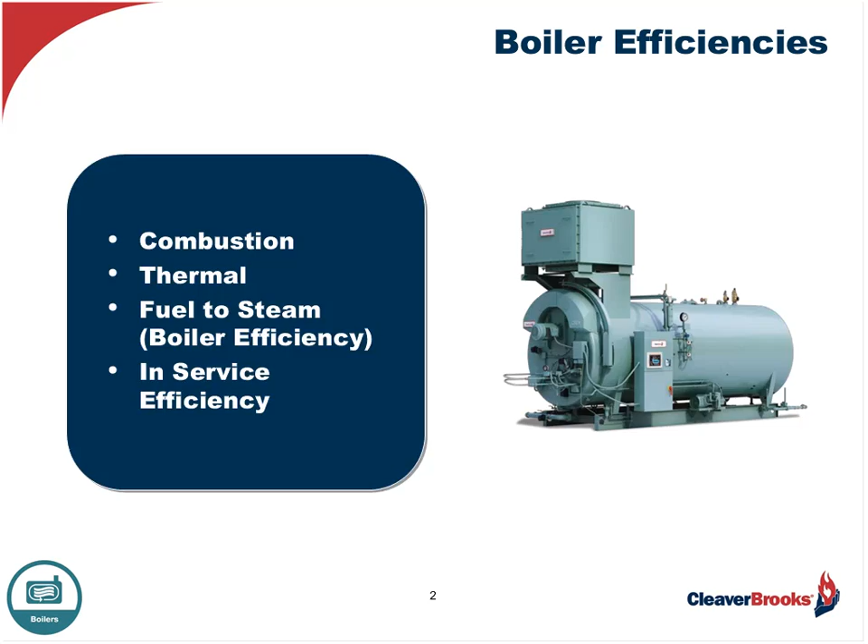When we talk about boiler efficiency, we can boil it down to these basic terms. We have combustion efficiency, thermal efficiency, and fuel to steam or fuel to water efficiency if it's a hot water boiler. That's also the same as boiler efficiency, so boiler efficiency and fuel to steam or fuel to water efficiency are synonymous terms. The last one, which has come out recently and is a good way to evaluate boiler efficiency, is termed in-service efficiency. Today we'll go through those and determine what they really mean.

If we start with combustion efficiency, actually combustion is a chemical process. It starts with a fuel which is primarily carbon-based. It could be natural gas, it could be oil, which has hydrogen in it. We also have, within that fuel, possibly some sulfur if we're burning oil, and we have nitrogen.

Then we combine that with the air that we breathe for combustion, which contains oxygen and nitrogen. Nitrogen, by the way, is about 78% of the air that we use for combustion, and quite frankly, that goes along for the ride. It does nothing as far as oxidation is concerned.

So then we have a burner that takes these elements, the chemistry goes on, oxidation occurs, and when that oxidation occurs, what we get is heat that comes out, the BTUs. We have some CO2, carbon dioxide, which some will refer to as the global warming gas. We have some water, and we have carbon monoxide possibly, which we try to keep to a minimum—we'll talk about that later. We might also have some nitrogen oxides and sulfur oxides, depending upon the fuel. These are emissions that come out of this oxidation process that we have to contend with.

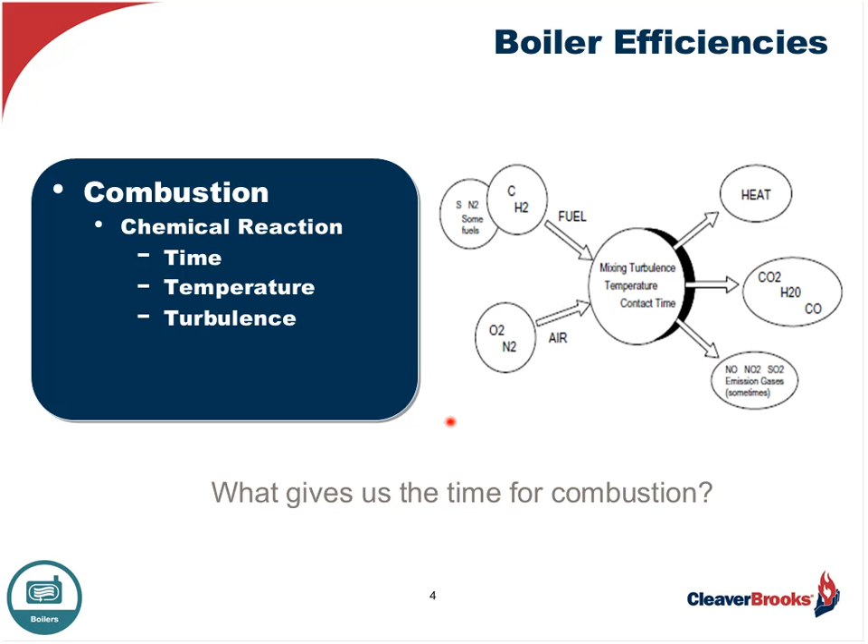Now, if we look at radiant heat transfer, we're talking about things like emissivity. We're talking about the theory of Stefan Boltzmann, who looked at radiant energy and how effective it can be if properly employed. Remember, we've got a huge delta T here. You've got temperatures in this furnace over 2,000 degrees, and a water side temperature that might be in the 300-degree range or less. Tremendous delta T, and as a result the heat transfer is very extreme, and we want to take advantage of that. That's one of the things boiler designers today are doing, trying to take more control and advantage of radiant heat transfer in the furnace.

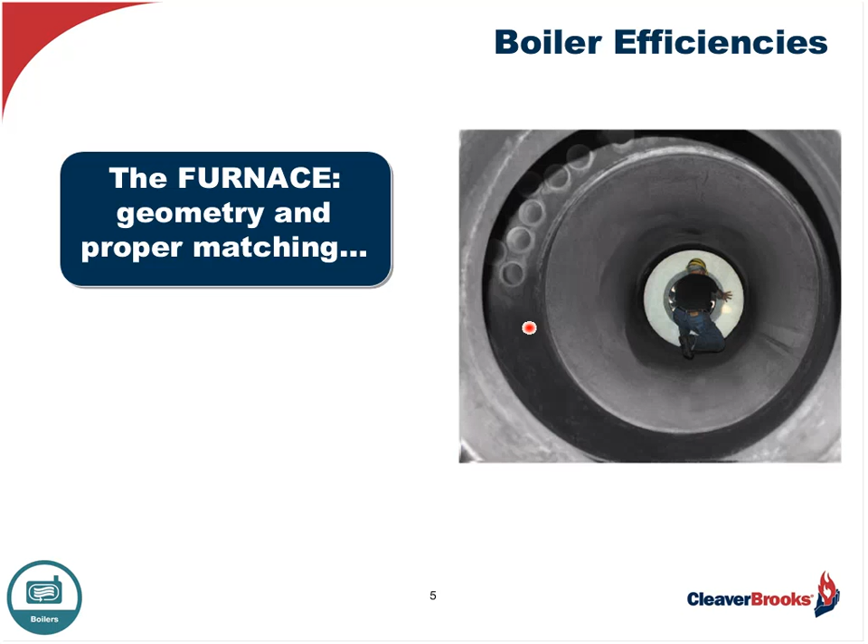So for us to be able to achieve 100% combustion efficiency, I have to burn every single molecule of fuel. I'll have no excess air, no hydrocarbon, no CO. That is called perfect combustion. If you want to put a number on it, it's 100%. It's stoichiometric combustion. But you know that's not found in the field.

We don't do that in the field. We don't set it up that way because it could be dangerous. If we start to go fuel rich without proper control, we can have what we call a fireside occurrence in this business. The reason is variances in the atmosphere we have positively no control over: the ambient temperature of the room, which is our combustion air, the barometric pressure, which can rise or fall, the relative humidity, the calorific value of the fuel. All these variables make us set these burners up at something less than stoichiometric. We've got to go on the conservative side, so we add additional excess air to keep us safe.

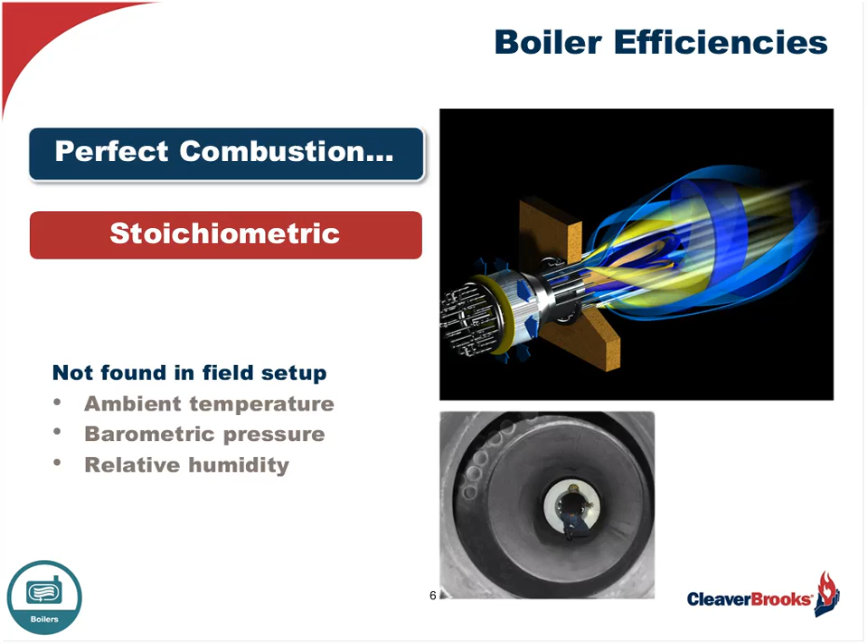So what is excess air? Well, it's nothing more than that percentage of air which is above the stoichiometric, 100% combustion efficiency point. Remember, when we talk about combustion efficiency, we are only talking about the effectiveness of that burner to properly oxidize the fuel and air and combust. So when we talk about excess air, it's that percent, that volume of air, which is over stoichiometric combustion.

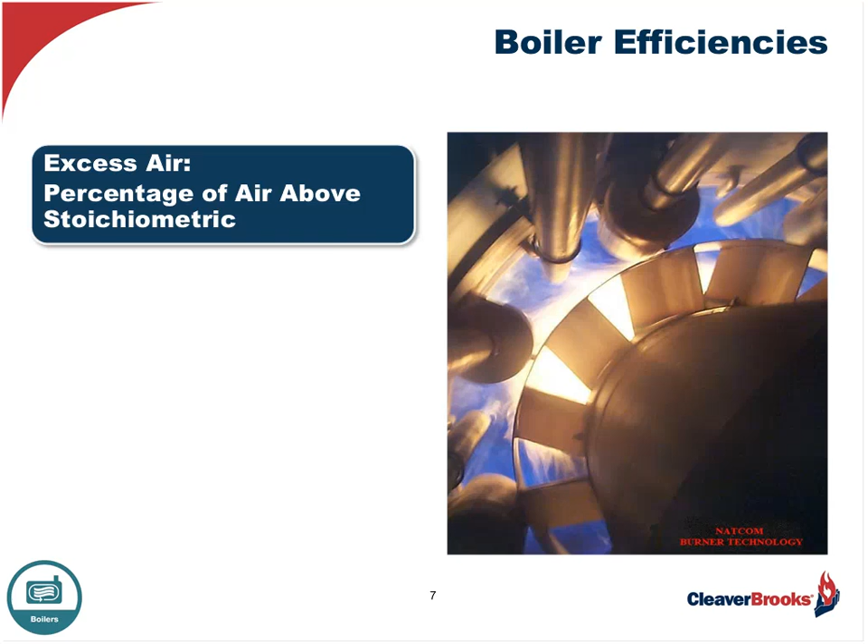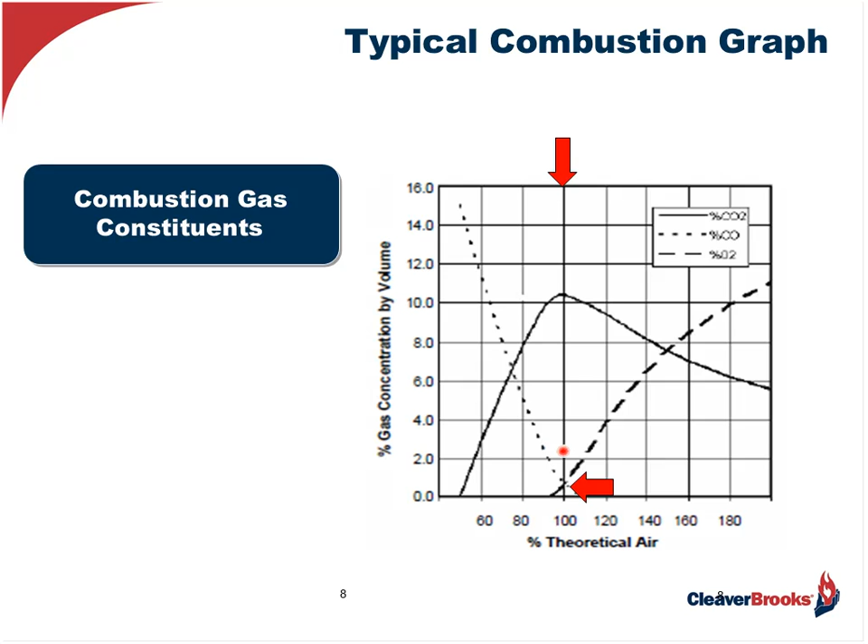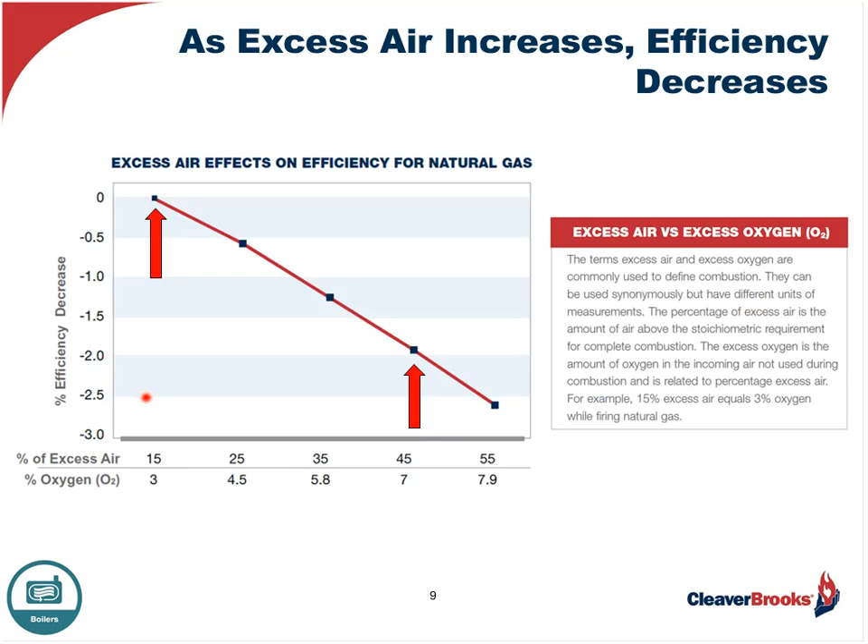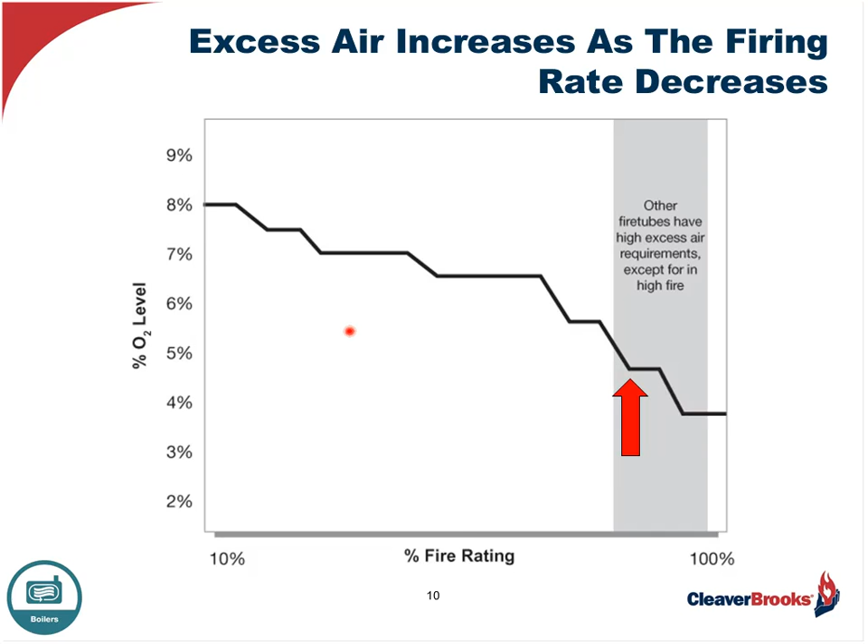I mentioned before that there's variables that we have no control over. One of the biggest threats that we have to good, safe, and efficient combustion is the temperature in the room, the ambient air, the secondary air that we use for combustion.

Here what we did is we set this boiler up. It was 80 degrees in the boiler room. The barometric pressure was 29 inches of mercury, and we set it up at 15% excess air, which is 3% O2. Not at all uncommon, especially down south in the summertime. That temperature in the boiler room creeps to 100, you've got no control over that, or it goes to 120. Look what happens to my margin of error: 9.6, 1.1. I'm getting close to stoichiometric here.

Pretty dangerous. Now, if I go the other way, I'm blowing that nitrogen out the window, right? 78% of our air, where I go from 80 degrees to 60 degrees in that boiler room here in Milwaukee. The air is now denser, it's colder, it's denser, and as a result, my excess air increases. I'm just heating that air and blowing it out the stack.

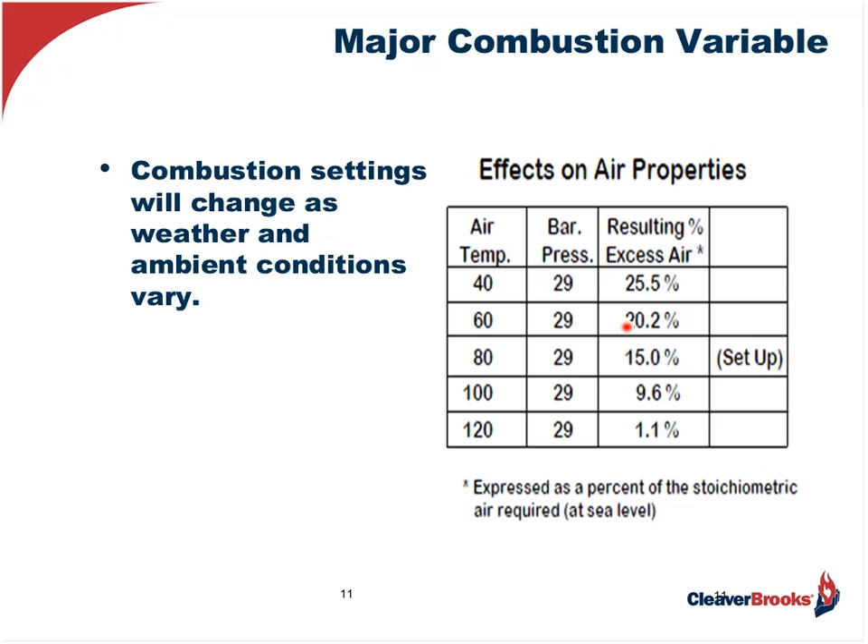So what do I do about that? This is where an O2 trim system can really help. If you have a boiler room that varies in temperature and you've got no control over it, and or you've got a boiler that modulates a lot, especially one with single point positioning, a lot of linkage, it's a good candidate for O2 trim. If that boiler room doesn't vary in temperature, if it doesn't modulate a lot, it could be a waste of money.

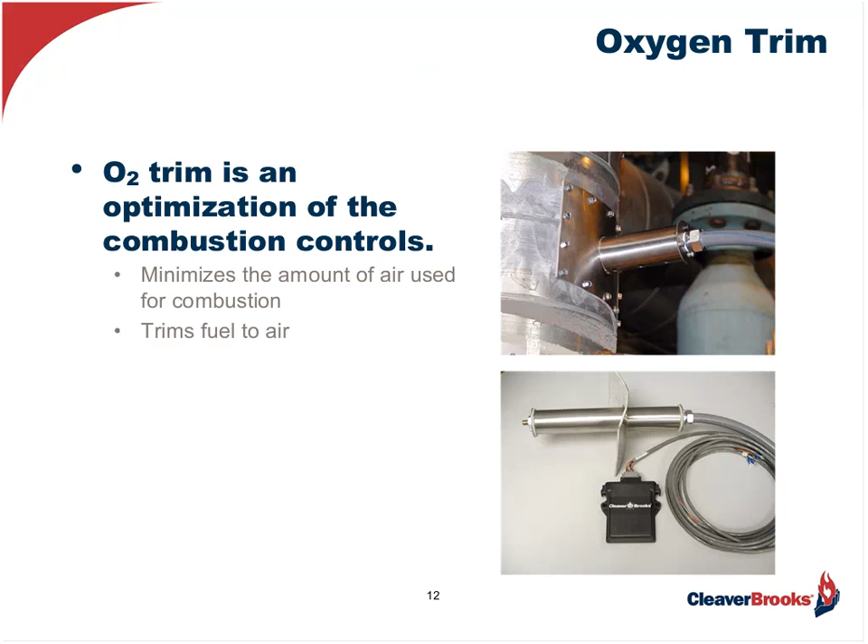Now, the other thing that's very important to keep in mind when we're talking about combustion is supplying the proper amount of air for that combustion process. A good rule of thumb that we've used over the years is 10 CFM per boiler horsepower. 8 CFM of that is to support the combustion process, to oxidize the fuel, and 2 CFM is used for ventilation. That's not to keep the boiler operator comfortable, it's really to make sure that room does not go negative.

Let's say we've got a 300 horsepower boiler, we need 3,000 CFM of air. You divide that by 250, and that will give you the cross-sectional area in the room that we need for ventilation.

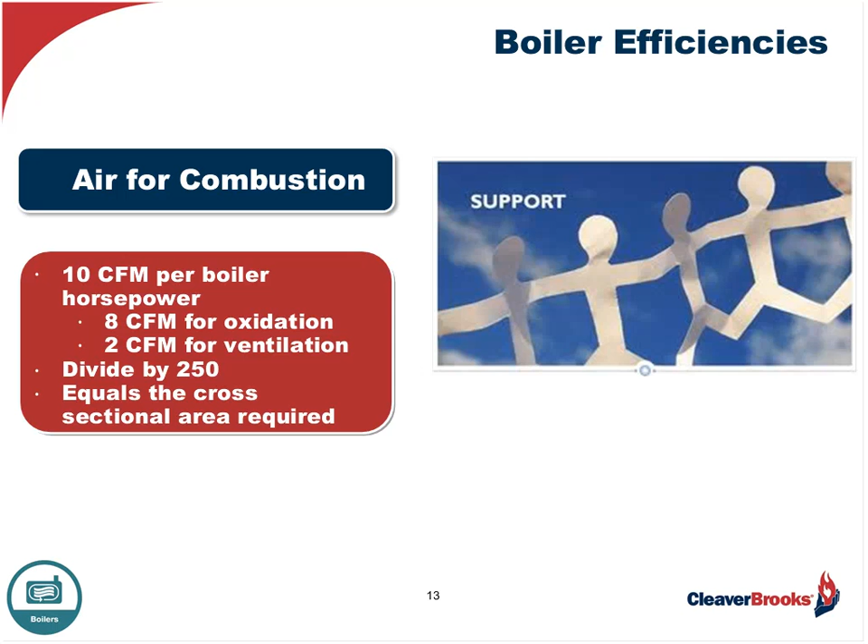Okay, let's move on to the next efficiency criteria that we would like to define, and that's thermal efficiency. Thermal efficiency is nothing more than the ability of this heat exchanger that you see right here. Here's my burner, it's firing into the furnace. That's the radiant area right there, as you can see, in the furnace. And then I've got these convective passes. This fire tube boiler has these tubes, the hot gases are going through it. When I talk about thermal efficiency, I'm only talking about the ability of this heat exchanger to absorb the heat, to take that heat, put it into the water, and generate hot water or steam. That's all I'm talking about.

That energy is going to vary as I turn the burner down. I can have a 4-to-1 turn down, a 10-to-1 turn down, or a 20-to-1 turn down burner. It's all about the amount of energy going into that unit that is being absorbed by that heat exchanger, so it goes into the water to make hot water or steam. It does not consider radiation and convection losses. So that means those radiation and convection losses are lost somewhere, they're not going into the water to make steam or hot water.

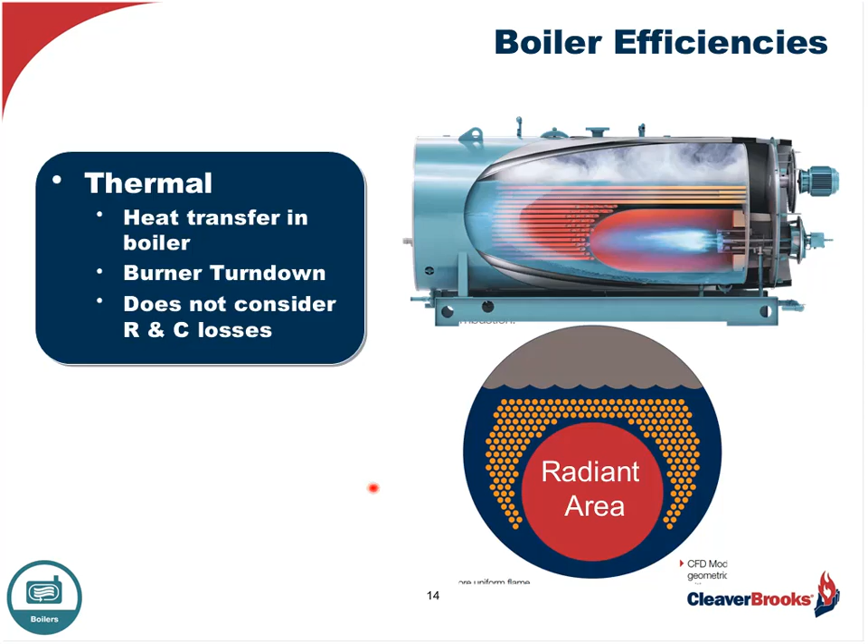Keep that in mind, we'll address it a little bit later. Now, one of the things that boiler manufacturers and designers are doing today to improve the overall convective heat transfer in the boiler, to enhance that thermal heat transfer and increase the overall thermal efficiency, is to add extended surfaces inside of those tubes to break up the gas, to get away from the laminar flow, which increases the Reynolds numbers, which is nothing more than a ratio between inertial and viscous forces, and also the heat transfer coefficient, which is the heat flux ratio against delta T.

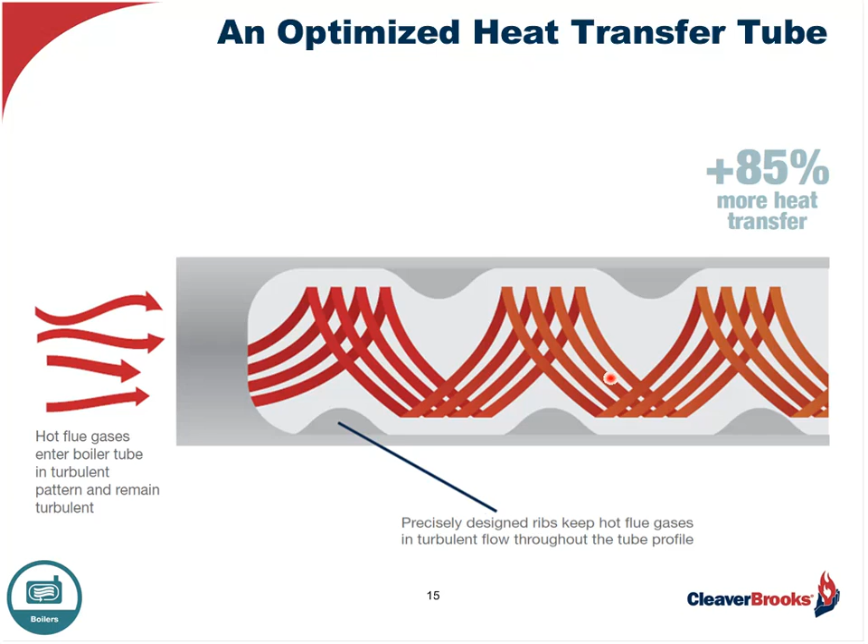So that's thermal efficiency. Now what about fuel to steam or fuel to water efficiency? Here, what you have is the net amount of BTUs that will be going to the process or going to heat the building, the hot water to heat the building hydronically. It's net of radiation and convection losses.

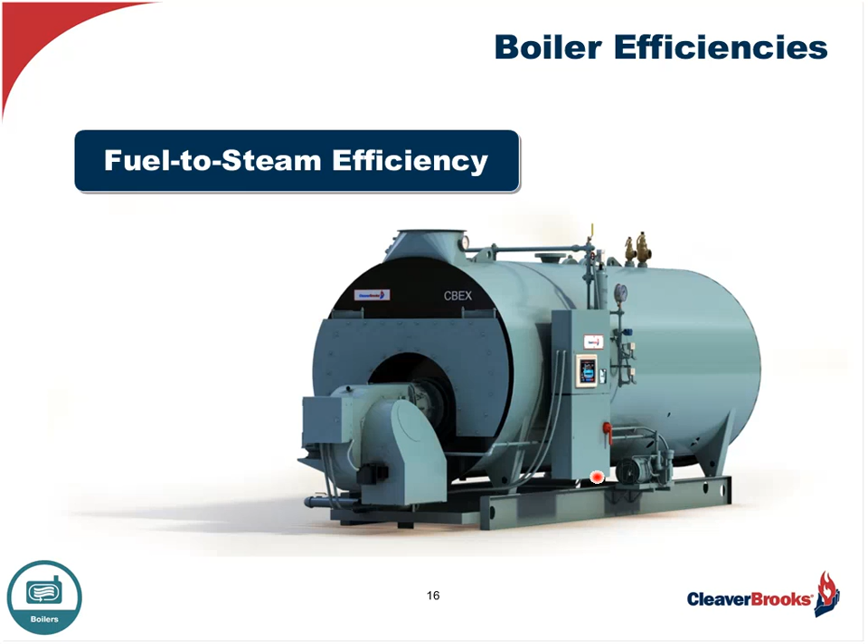Now, if we look at various boilers, those convection losses can differ anywhere from 0.5% to 2%. In other words, in a large fire tube boiler like this, it could be 2%, 1.5%. On a small little vertical fire tube like this, it might only be 0.5 or 0.75%. It depends upon the mass.

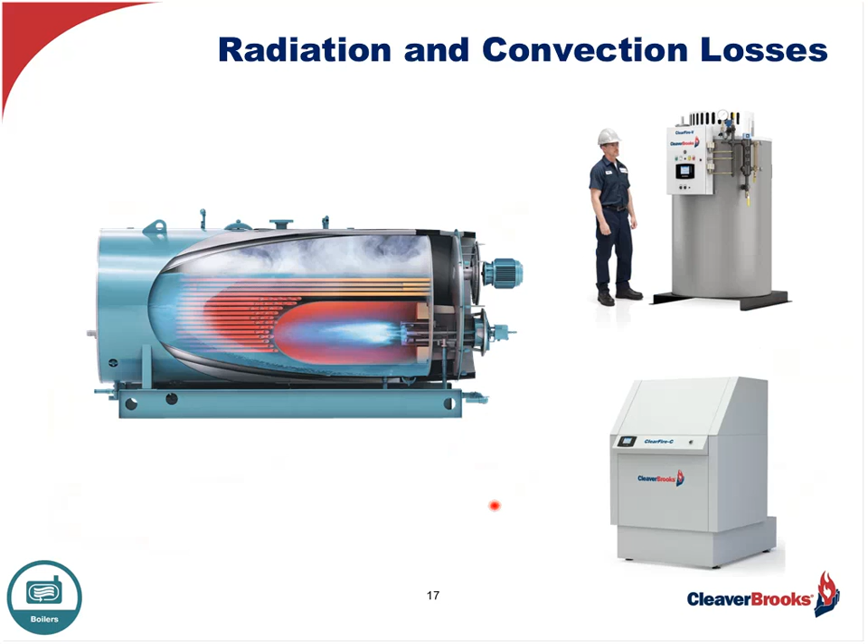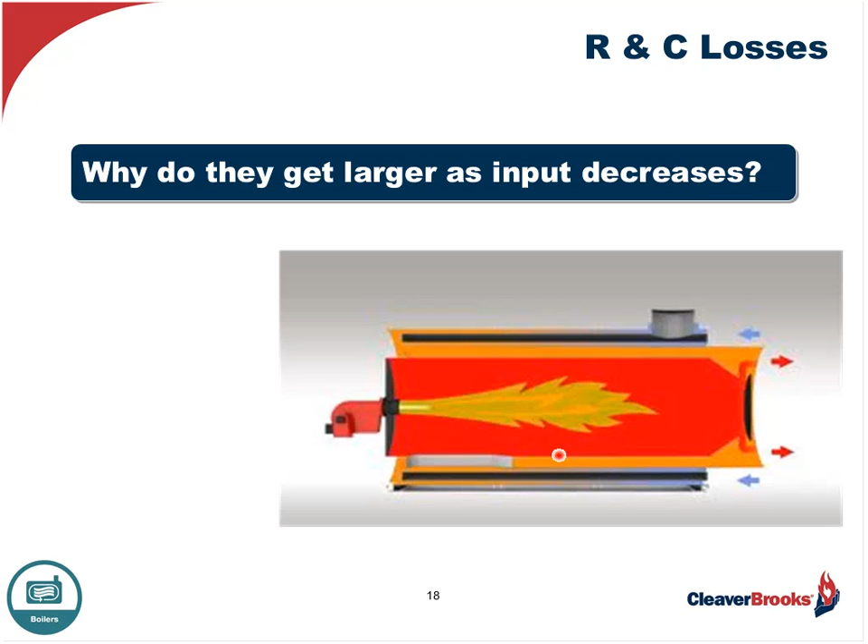Now remember, when we measure radiation and convection losses, and the reason I mentioned turn down before when I talked about thermal efficiency, is it's all based on input. The fact is, when we're considering radiation and convection losses, they get larger as the input decreases. Why would that be? The reason is your mass within the boiler itself - let's say we're operating at 100 pounds, the saturation equivalent to that is 338 degrees. Regardless of where I turn this burner down, that temperature is not going to change. So as I decrease the firing rate, therefore the input, I'm dividing into an ever smaller number.

So therefore the radiation and convection losses climb inversely to input.

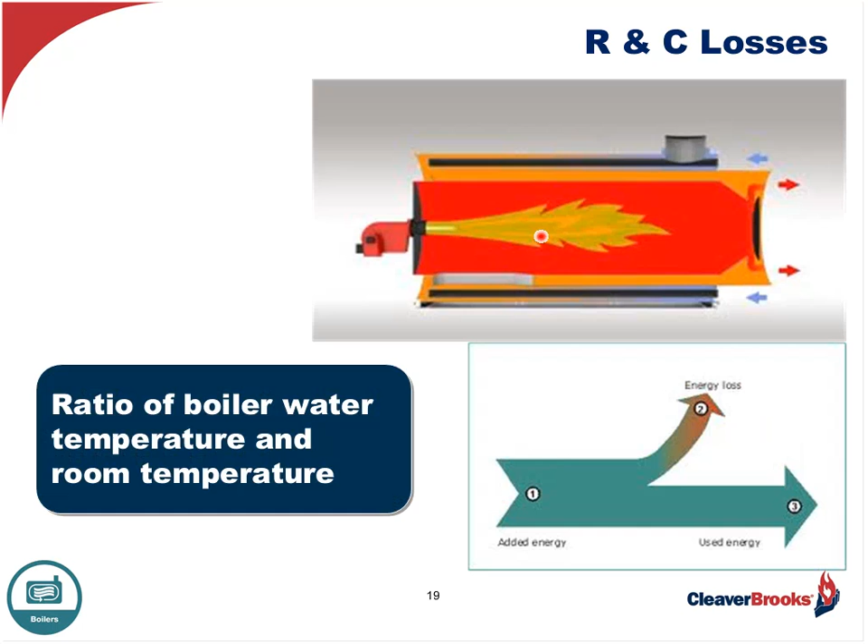All right, well, how are boilers rated? That's the next question.

Keep this in mind. When we as boiler manufacturers and promoters are selling boilers, what the engineer starts with is a catalog or engineering data. We're going to catalog that boiler saying it's a 100 horsepower boiler. Well, that's based at full fire, at 0 gauge pressure. All I've got is 14.7 pounds at sea level, so my gauge is reading 0. My feed water, keep this in mind, is 212 degrees. Now, how many boilers out there are fed with 212 degree water? But that's how we base the sizing of these boilers initially.

And then the engineer has to be smart enough to make accommodations accordingly based on the load, or what he's heating, or what the process might be, and size the boiler accordingly, if the feed water temperature or the operating pressure is going to be more than that, and obviously it will be.

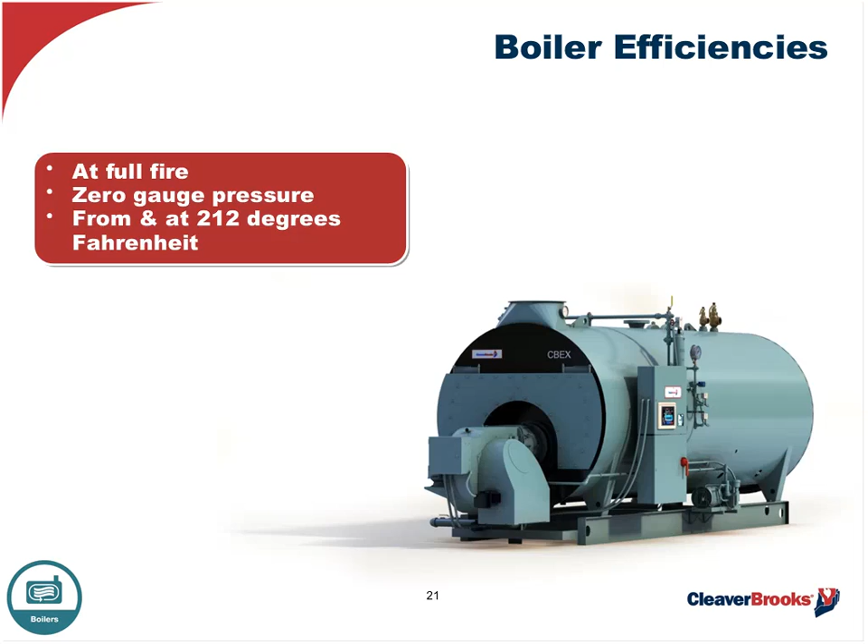So what else do I have to be aware of? Well, when we're looking at boiler efficiency and how well we're doing, you've got to remember that you have to benchmark the information that you're looking for. So let's say we're looking at the stack temperature coming out of that boiler. The stack temperature in an efficient boiler is going to run anywhere between 50 and 100 degrees above the saturation pressure or temperature based on pressure.

So when we're looking at efficiency and we want to evaluate it, the first criteria we have to look at is what's the operating pressure, because that's got an equivalent temperature. More importantly than that even is what's the firing rate? Am I at low fire, medium fire, high fire when this stack temperature is occurring? What's the ambient temperature in the room? Is it 100 degrees, is it 60 degrees? Because that's going to add to the gross temperature of that stack.

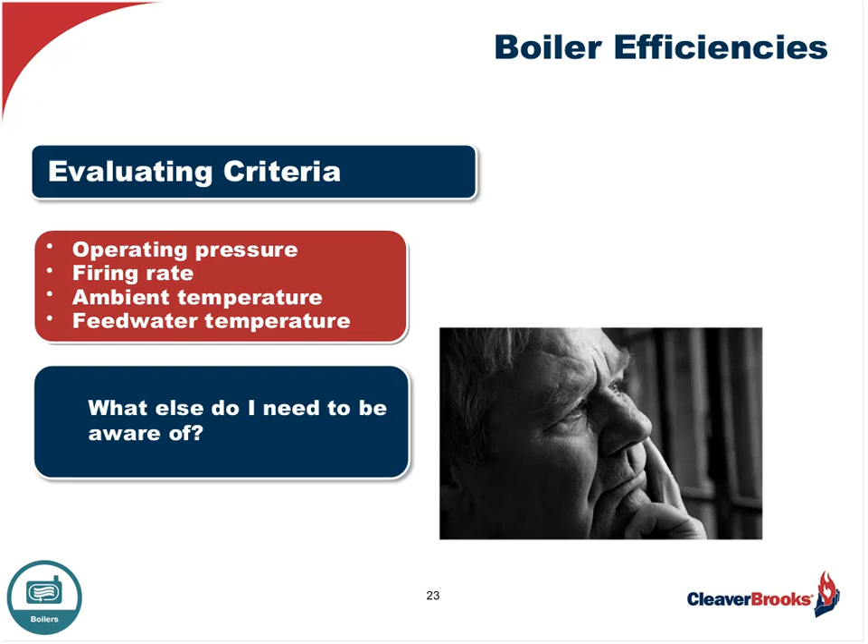And then lastly, what's the feed water temperature? What's coming into that boiler? Is it 212? No, 180? Could be. 227 coming out of a deaerator? Could be that. All right, what else do I have to be aware of?

Once I've established that benchmark, and I now have something logged in my boiler room log that says my stack temperature is now 395 degrees, I'm operating at 100 pounds. The next day you come in and my firing rate is high fire, the ambient temperature in the room is 90 degrees, and my feed water temperature is 180. You come in the room the next day, or 2 hours later, the criteria is all the same, but my stack temperature has gone up.

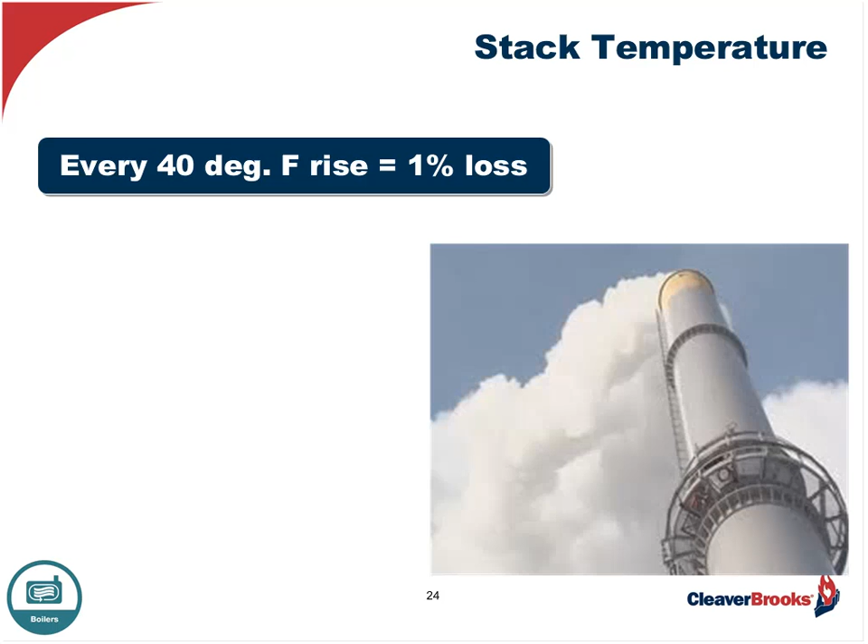That costs you 1% in fuel to steam efficiency. And what causes that? Sooting on the fire side, scaling on the water side. I'm impeding the heat transfer across those tubes, whether it be a water tube or a fire tube. So the first thing is to make sure you've got a very reliable stack thermometer in that stack, and you very conscientiously log temperatures against pressure, firing rate, ambient temperature, and feed water temperature. Very, very important, because when you see something like I'm showing you right now occur, something's gone on with that boiler. And 9 chances out of 10, it's the water side or the fire side that's either gotten fouled from soot or scale.

Another example, follow me here. I'm at 220 degrees, my flue gas temperature. I've gone to 260, and you can see right here in the numbers, I've gone from 84% to 83%. I've lost 1% based on that 40 degrees. Now here's something else that's really interesting when I talk about the confusion in terms out there. This is really a fuel to steam or thermal efficiency chart, but look what they call it, combustion efficiency for natural gas. It has nothing to do with combustion efficiency, really.

We're looking at either fuel to steam, or fuel to water, or possibly a thermal efficiency. If the radiation convection losses are included, it's thermal. If they're netted, it's fuel to steam. So that's how this confusion is promulgated.

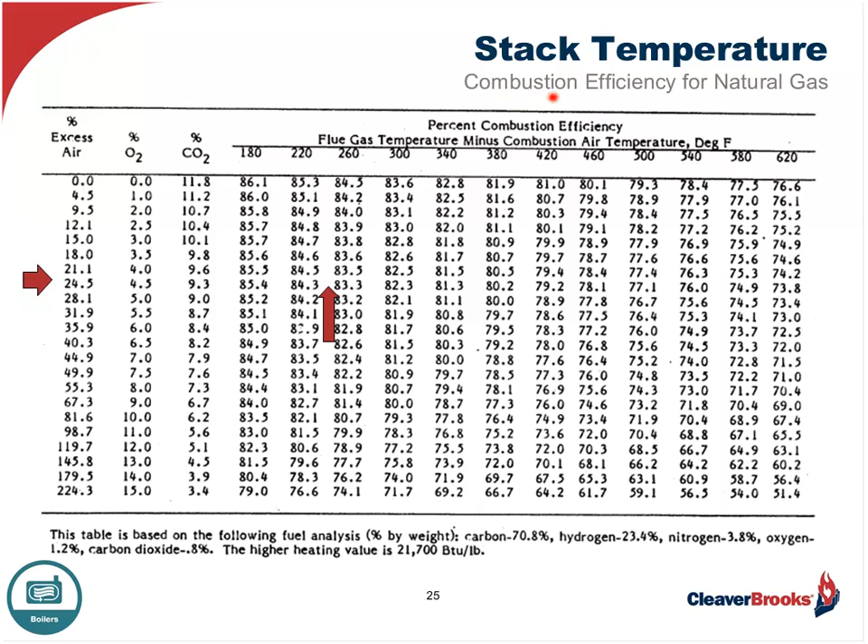If I go to 100 pounds of operating pressure, and I'm at 212 degree feed water, I've lost a little bit, 34.5 to 33.2, because of the operating pressure increase, more BTUs required for sensible energy to get that temperature up so I can start to apply my latent energy. That's why that is.

But anyway, look at this drop because of the two: 100 pound operating, 100 degree feed water, I'm down to 29.8. So when I thought I was going to get 34.5 because of these conditions, I'm down to less than 30 pounds per hour, per boiler horsepower. The importance: operating pressure, feed water.

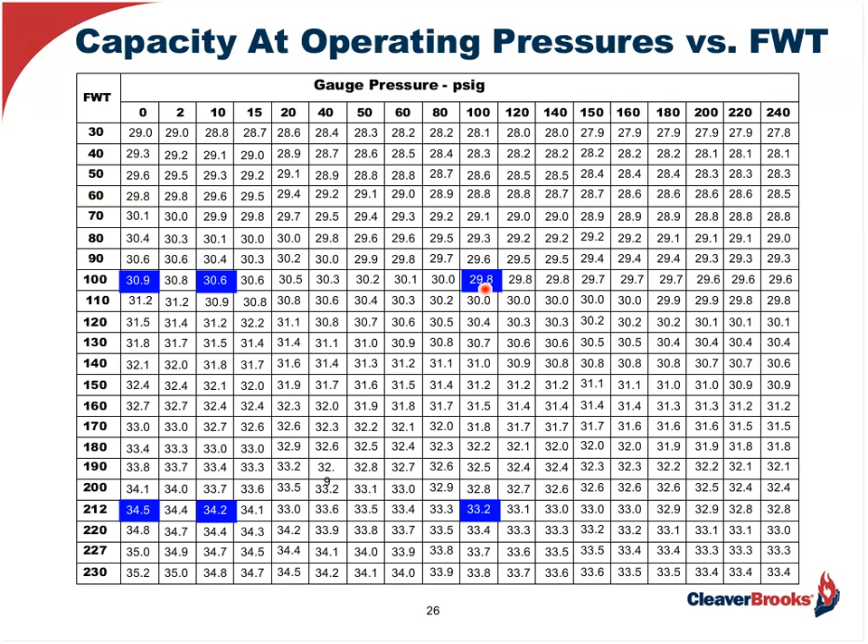Now let's talk about the boiler sweet spot. We've got a number of boilers that we manufacture, various types, configured with various controls and burners and so on. But every one of those is unique. Each type has its own signature based on horsepower, fuel, burner, and so on. It's got its own signature, its own sweet spot, and that becomes very important.

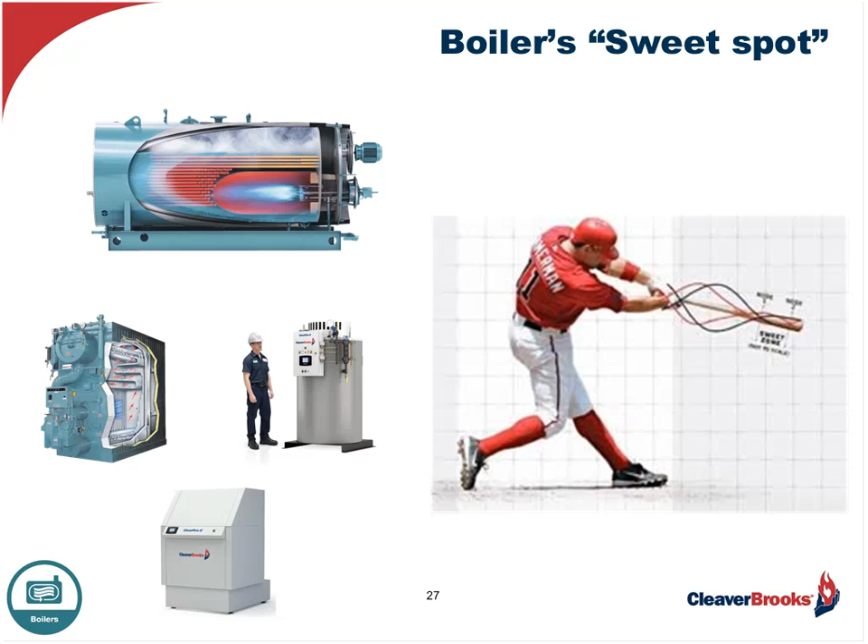We understand the load so that I can select the proper boiler to handle that particular load so it's operating in its sweet spot most of the time.

As I said before, we find a lot of boilers out there operating at about 60% of the firing rate. In this particular case, and there's a lot of them out there, we just took an overall average—this is the sweet spot. That's where you want it to run. You don't want it running down here or down here and then cycling a lot, and we'll talk about that as well.

You want it to be operating at the sweet spot. So you've got to find out from that manufacturer, from that sales engineer, if I put this boiler in, where is it most efficient? So I can size my load accordingly and keep it there as much as I possibly can.

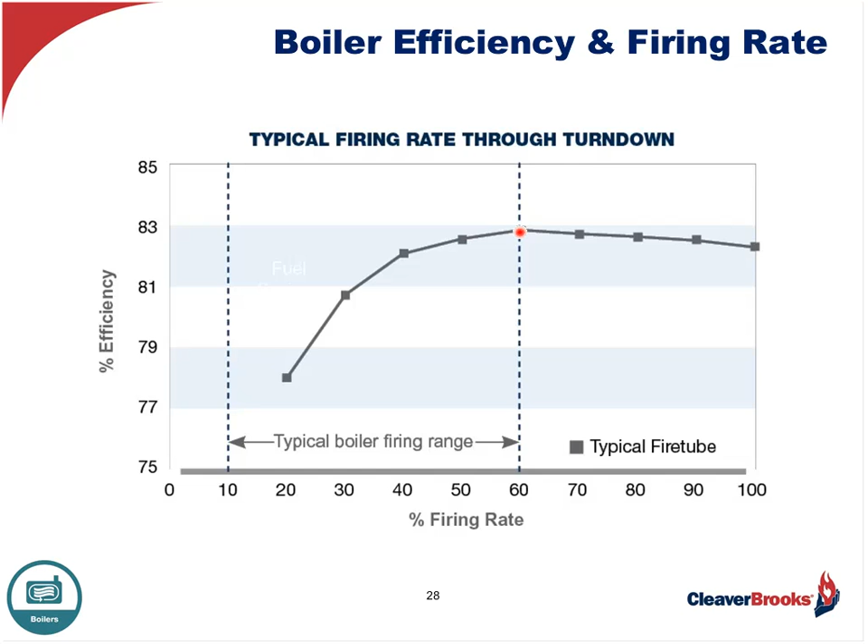Well, then how do I measure efficiency? There's really two methods to measuring efficiency: it's either the input-output method or the heat-loss method.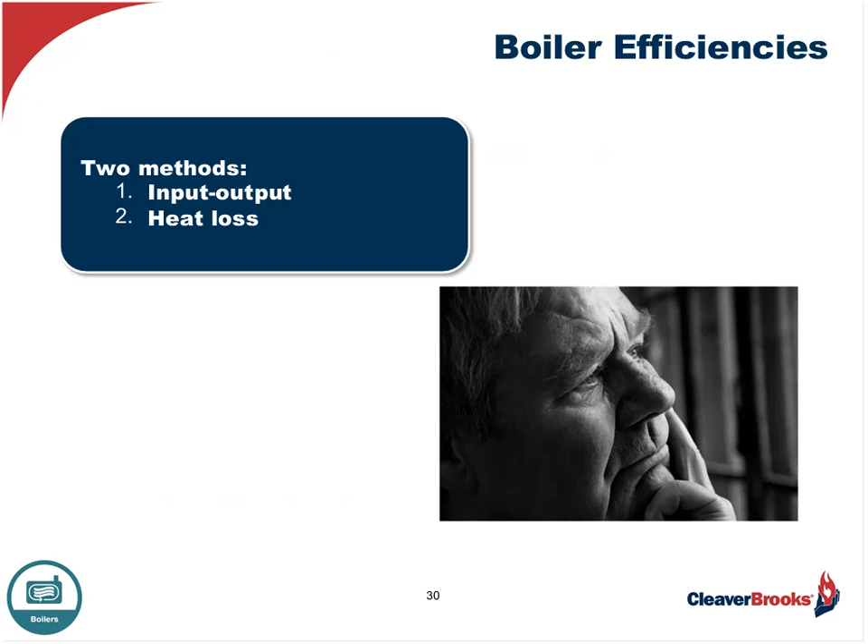If we go to the input-output method, it's much more complicated. Quite frankly, in all the years I've been in this business, and I think Rakesh will attest to this, who's on the expert panel here, the input-output method—the juice may not be worth the squeeze. You have to go through an awful lot to conduct an input-output test.

It involves calorimeters, which are devices to determine the amount of moisture in the steam coming out of that nozzle. We also have to have flow meters—it might be a steam flow meter or a water flow meter, because I want to make sure that what is going in, I can calculate what's coming out of the boiler. So I can either map my feed water or I can map my steam output.

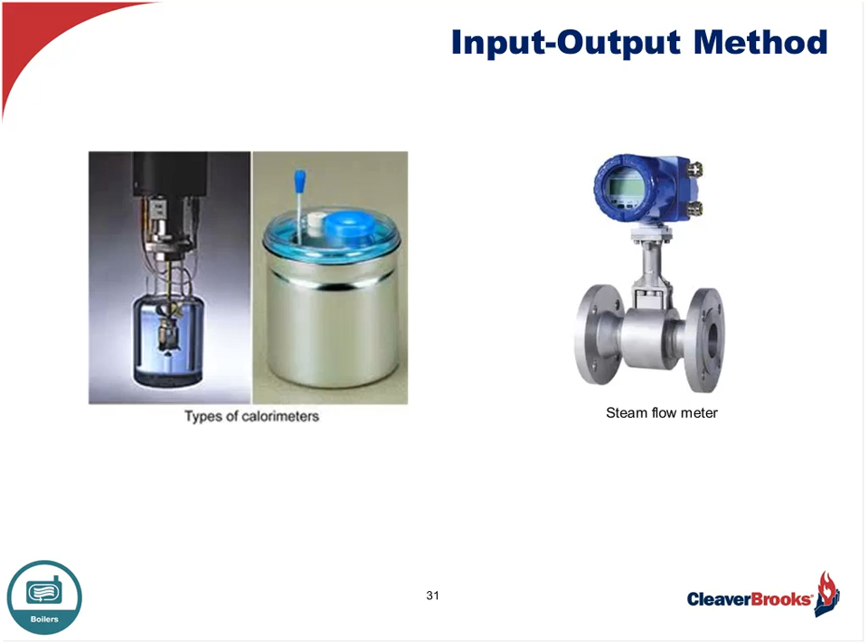And then, of course, I look at stack temperature, the constituents of the gas, my dry gas temperatures, the dry gas and moisture losses, and so on. That all goes into the input-output method. Even though it can be very precise, it requires a lot of labor, instrumentation, and complexity.

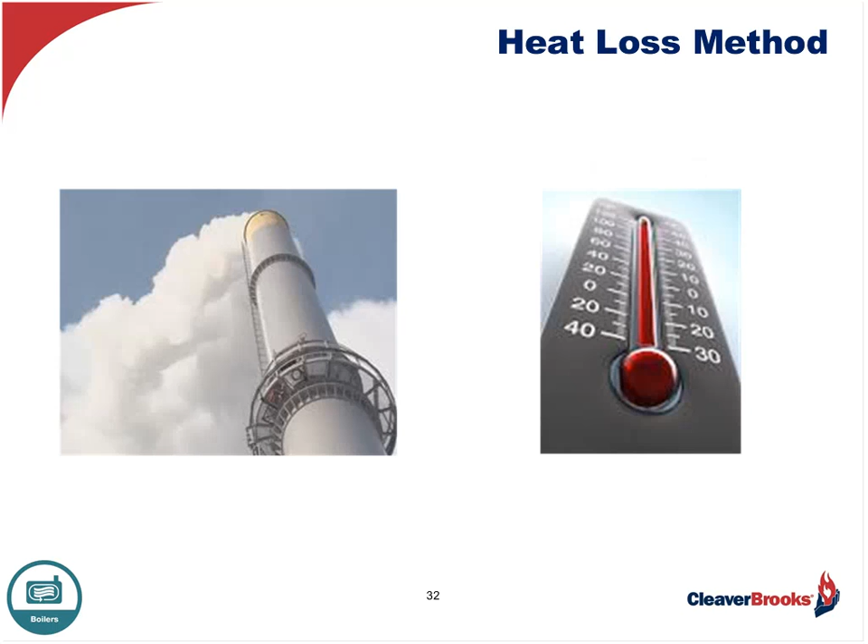We've found over the years that probably the best and most efficient way to go about this is just the heat loss method. What this does is take into consideration what the stack temperature is above the saturated temperature of the boiler itself. It takes into consideration the constituents in that gas, and it also accounts for the moisture losses.

So what we're looking for is the temperature, the carbon dioxide, the excess O2—remember, we're trying to hold as close to 3% O2 as we possibly can. It'll then give us a net efficiency overall. It'll also say whether or not we've got any carbon monoxide in that gas, or any nitrogen oxides, which are a precursor to smog, so we want to limit that, especially in places like California, Texas, Louisiana, New Jersey and other places.

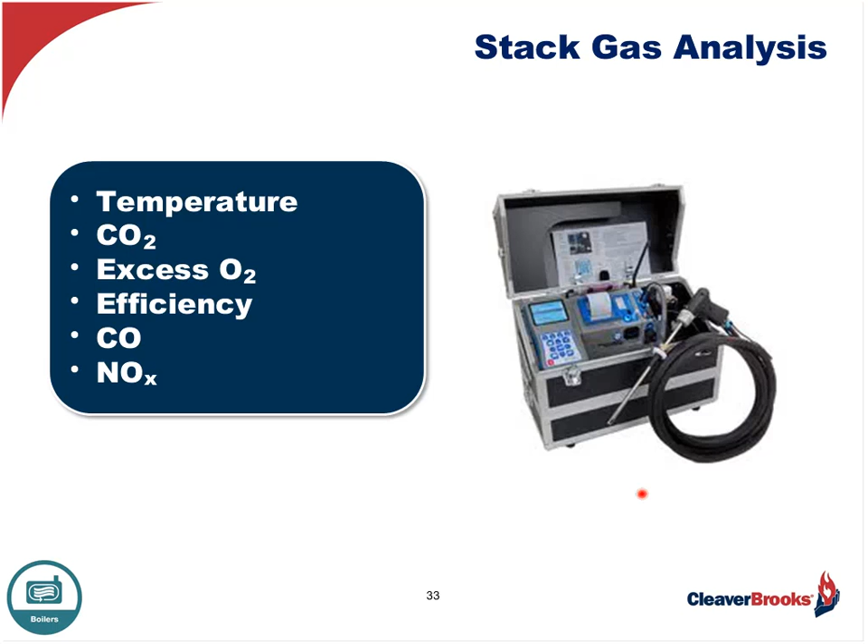That's what this stack gas analyzer will do for us. It's relatively simple, but when you go through an input-output test and compare it to the stack gas analysis, we're often very, very close. So I would rather lean toward expediency as opposed to something more complex when determining my overall efficiency.

Now let's look at in-service efficiency. The criteria for that: stack losses, radiation and convection losses, startup losses, cycling losses which result in purge losses, turn-down losses which relate to excess air. Most boilers, when they turn down, the excess air rises. What about blowdown losses? And what about changing load response? In other words, how effective is this boiler in reacting to load swing? So that's the in-service efficiency criteria.

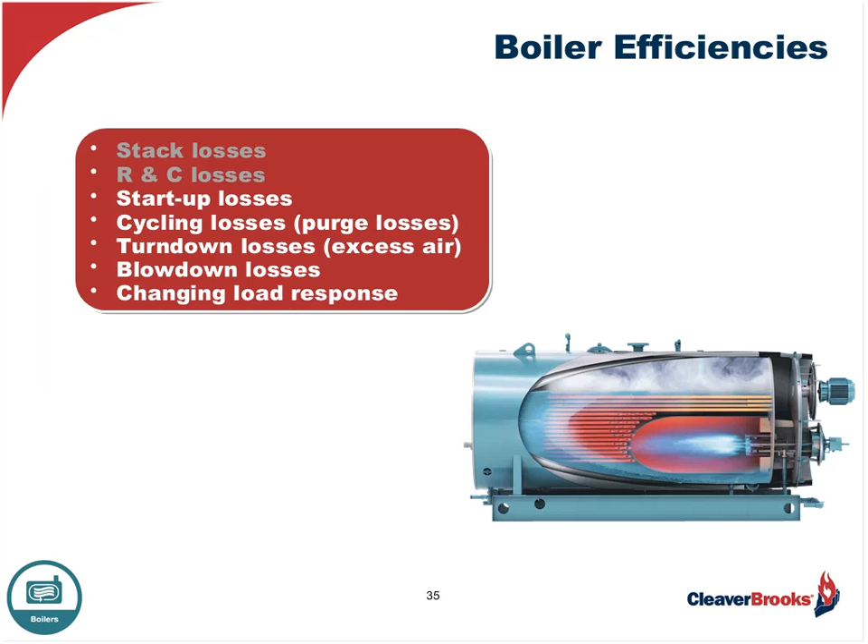Let's look at those. We've already addressed the stack losses and the radiation and convection losses, so we'll move right into the startup losses. Startup losses assume that a boiler is offline and cold, so it's at ambient temperature.

Here I've got a fire tube boiler, which has got a lot of mass — it's 5 square feet per boiler horsepower — against a vertical boiler here that has far less mass, maybe only 2 or 2.5 square feet per boiler horsepower.

The whole point is that if I'm starting this boiler to meet load versus this boiler, and they're both at ambient, this boiler is going to heat up faster and catch that load faster, no doubt about it. So the engineer might say, I'm going to put in a bank of these as opposed to one or two of these.

But don't forget one other thing about this. Once this boiler comes up to pressure, it has a lot of thermal mass — possibly a lot of refractory, a lot of residual heat. So once it comes up to temperature, even when that burner cycles off, it continues to steam.

I don't think anybody would disagree that a boiler that's not firing is more efficient than anything, but this is really true: these larger mass boilers, once they come up to temperature, hold that heat. So once they start getting swings within the load itself, this thing will respond just about as quickly as this one. But it all depends upon that load.

Should I go modular, low heating surface, low mass? Should I go with a larger boiler, fewer in number, but maybe with turn-down matched to the duplicity that would be required for more modular-type units?

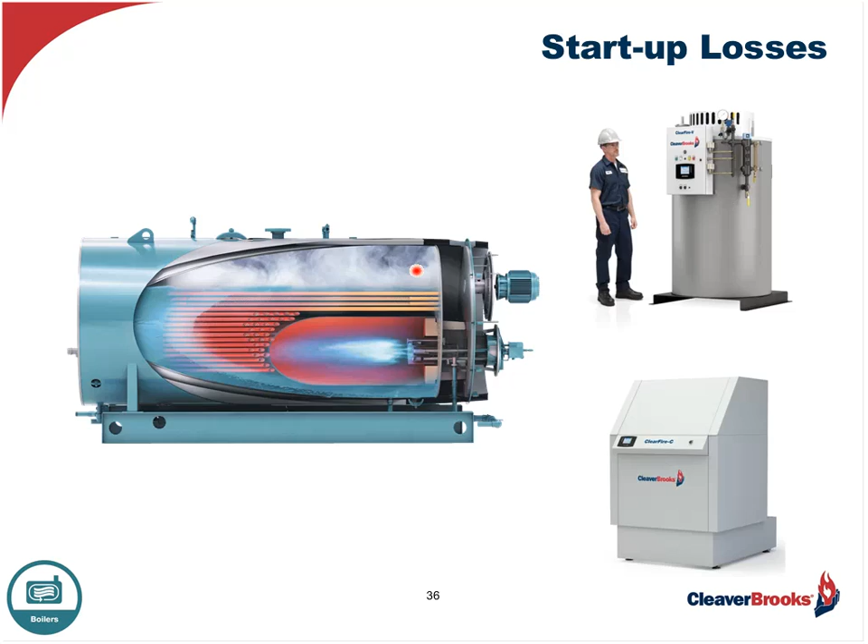What about cycling losses? This is one of the worst culprits as far as energy loss is concerned — cycling. Boilers put in maybe years ago still have a lot of useful life, but they don't have proper turn down, they haven't matched that load. We've done a lot of things to the process and the building, it's much more efficient, and these boilers are cycling, turning on and off 15, 20 times or more an hour.

As a result, we are blowing energy out the stack, blowing dollar bills out that stack because of all the cycling losses, cycling on and cycling off. This is where turn down becomes so important too.

Maybe you've got an older boiler that's still in very good shape. You could retrofit it with a high turn-down burner, or keep the same burner but change the overall linkage and how the damper is controlled and configured, and add 10-to-1 turn down if need be, if it's currently a 4-to-1 turn down. That can be done. Keep this boiler online.

It seems like an oxymoron, but actually that boiler staying online is a lot more efficient than having it cycle on and off 15, 20 times an hour. Why is that? The pre- and post-purge losses.

Every time that boiler goes down, it has to go through a post-purge, blowing ambient air through that boiler and chilling it down. Then it goes through a pre-purge before ignition — another 90 seconds or a minute and a half blowing air through that boiler. You don't want it to do that. You want to keep it online.

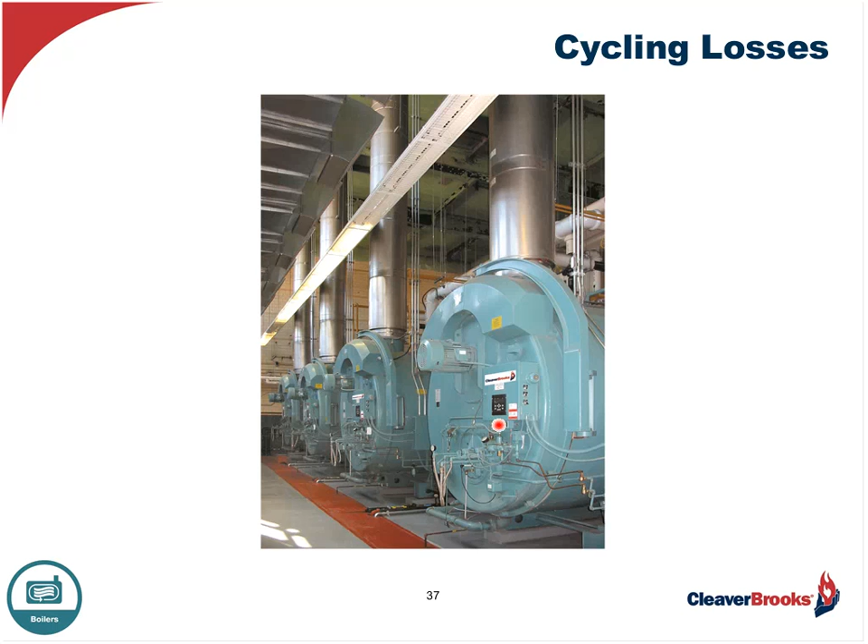Because all we're doing is blowing that energy out the stack into the atmosphere, heating the ducts. That's all we're doing. And remember, when we're talking about burning fuel, we're talking about burning dollars, cash.

Now, blowdown losses was also part of the criteria of in-service efficiency. If we've got continuous blowdown with a boiler, I'm trying to control the TDS level at 1500, or maybe a bit less or a bit higher. Our water chemical engineer has advocated a certain water treatment plan to control the total dissolved solids.

That boiler is skimming water off the top, and it either goes through a separator and into the sewer, or it can go into a shell and tube heater to recover those BTUs and put it into the feed water before it goes to the deaerator or feed system.

Why not reclaim those BTUs? But remember, don't ever try to recapture bottom blowdown. Bottom blow is performed once or twice a day, depending upon the chemical analysis and the requirement. It goes into a separator and you waste it, because otherwise you'll foul things with sludge, and it's so intermittent that the juice isn't worth the squeeze in paying for any recovery. So bottom blow, don't recover. Surface blow, think about it seriously.

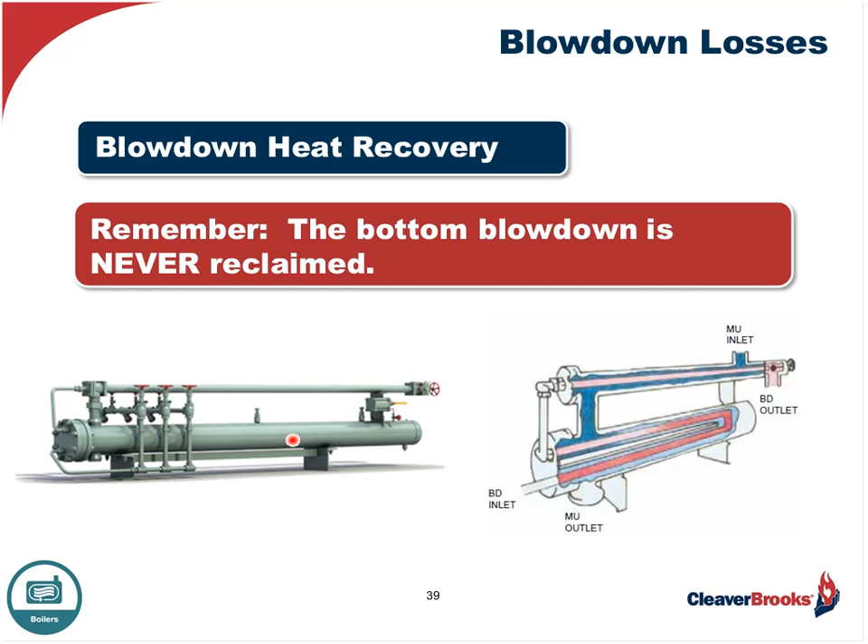What about changing load response? Part of the in-service efficiency. You might think it requires more energy to get a big boiler to respond. Well, from a cold start, absolutely right. If you've got a small modular type unit or a commercial type water tube product, these babies respond very, very quickly. And maybe based on the characteristics of that load, that's what you need.

But don't forget that these bigger boilers you might already have and invested a lot of money in, with controls and burners added, can do real well too if they're properly controlled and programmed, so that once they come up to pressure, they can respond pretty good. Water tube boilers innately respond much better than fire tube to swing loads, varying loads, because they have less mass. They can respond very, very well. But that doesn't mean you throw something like this out. It depends upon the load, what you have, and what might be done to make it respond better.

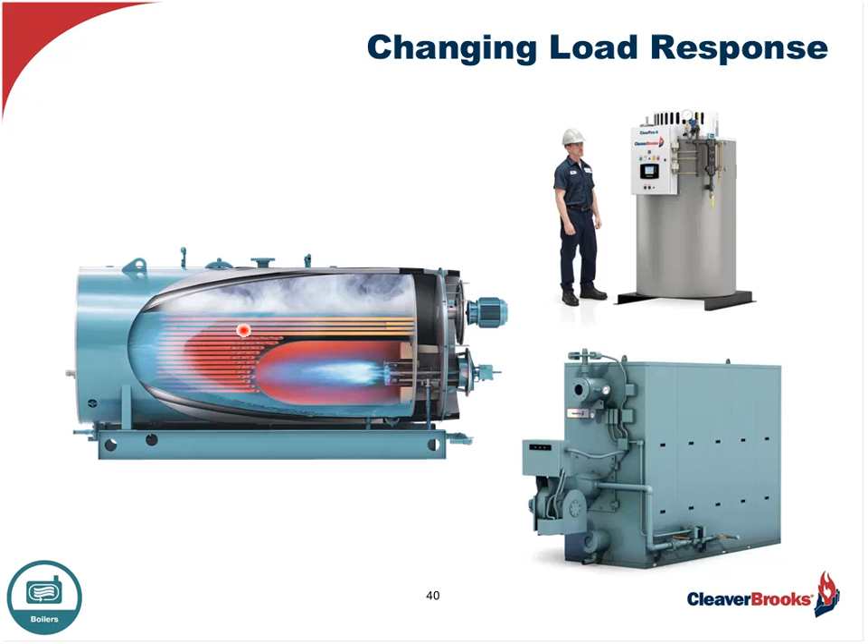So let's recap a little bit. Combustion efficiency takeaway: stoichiometric combustion is 100% combustion efficiency.

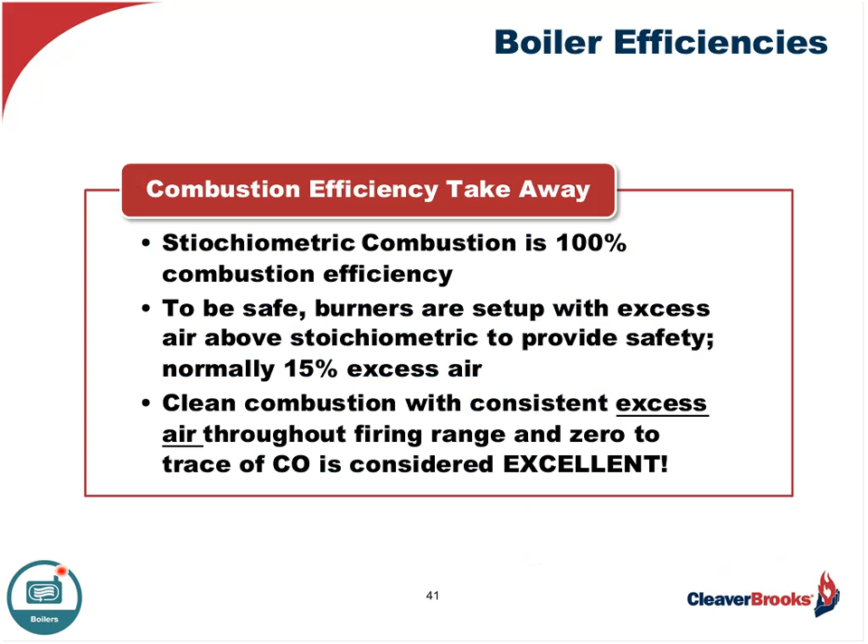To be safe, burners are set up with excess air above stoichiometric to provide safety, normally 15% excess air. Clean combustion with consistent excess air throughout the firing range and zero to a trace of CO, no more than 50 parts, is considered excellent combustion. So that's the takeaway from combustion efficiency.

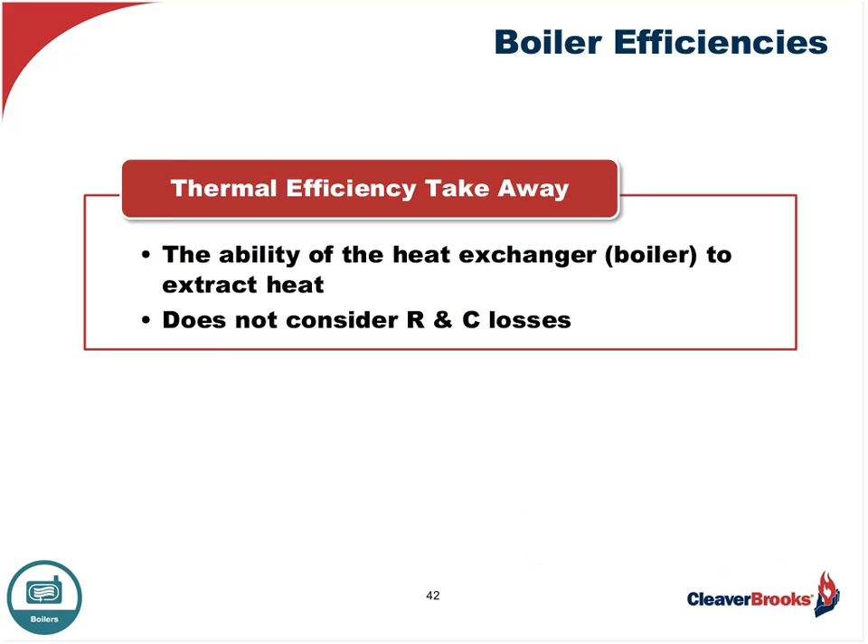Thermal efficiency, remember, does not consider radiation and convection losses. So those BTUs are going into the room that's already 100 degrees. It's not going into the process, not into the hot water to heat that building. What you want to look at is fuel to steam efficiency or fuel to water efficiency. So those are your takeaways.

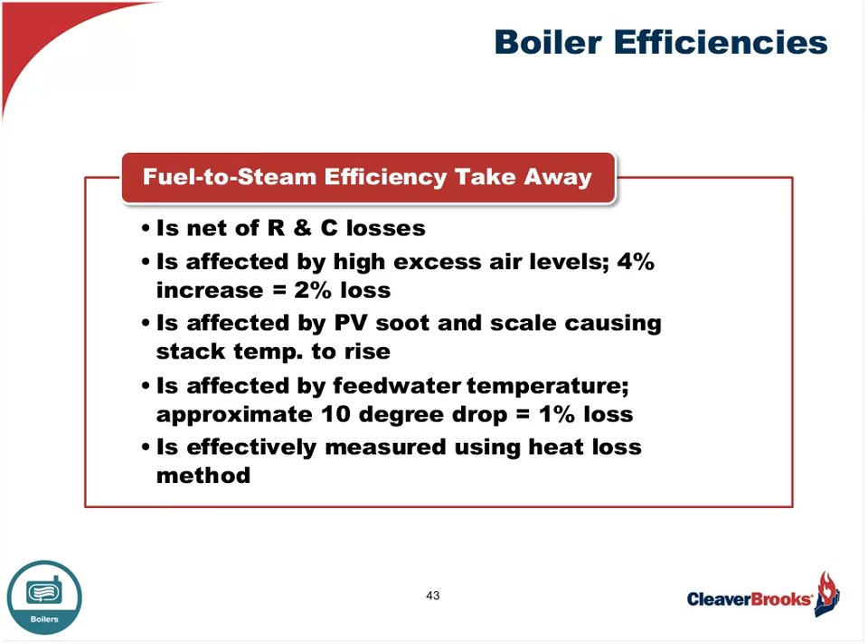In-service efficiency takeaways: cycling losses can cost 15% or more in overall efficiency. Never capture the bottom blow, but think seriously about blowdown heat recovery for continuous blowdown. Responding to load quickly is determined by the boiler mass and the water temperature within the vessel. Keep that in mind. There are good arguments for modular type low heating surface boilers, but also good arguments for a larger mass boiler too. It depends upon the application.

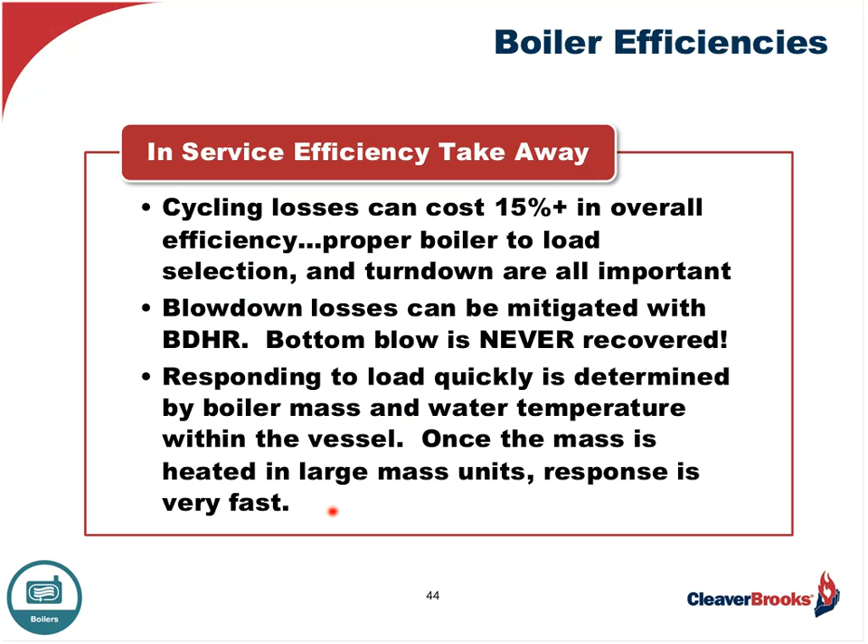So attaining the most efficient boiler system - first of all, and I think I've hammered this home, it starts with understanding the load. Understand the load so I can properly apply the proper boiler for that load, properly sized, with the proper turndown to match that load as it varies from low to high fire.

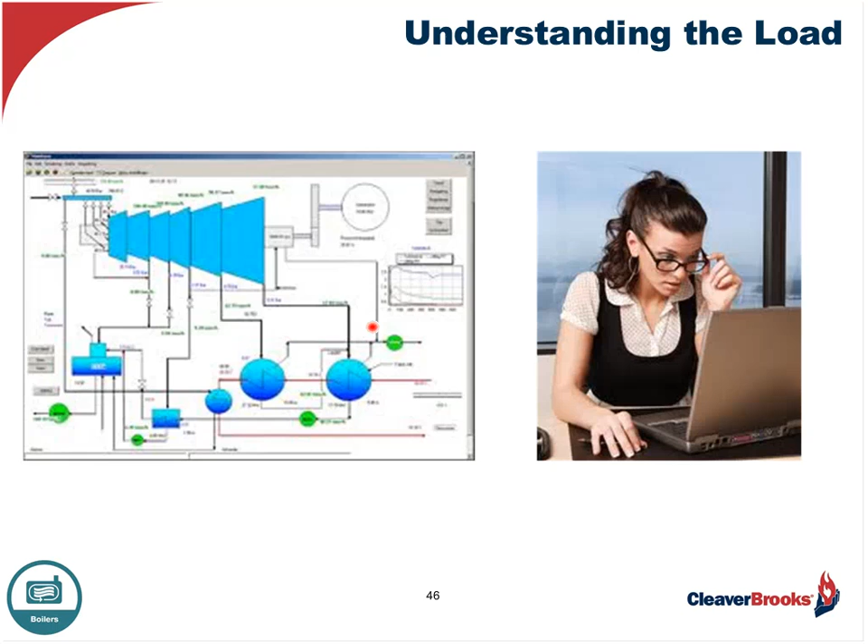Also need boiler burner compatibility. In most packages out there today, engineers have done a good job trying to make boilers and burners compatible so they deliver the highest combustion efficiency as well as convective heat transfer and radiant heat transfer to give us the highest fuel to steam efficiency. And of course, what's very important is how we control these boilers from a burner management standpoint and a combustion control standpoint.

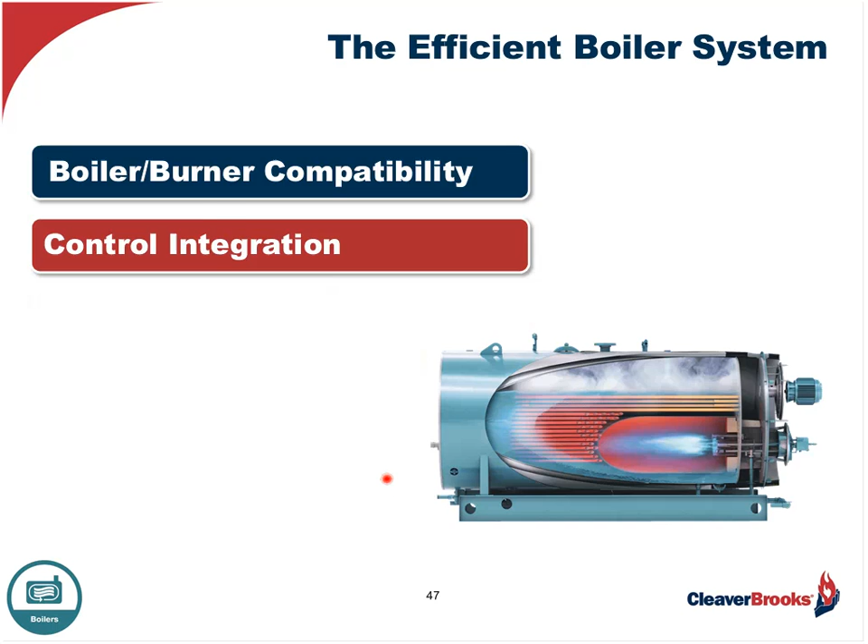Let's get rid of single point positioning. Let's go with parallel positioning, so I get rid of the hysteresis, stretch, and slip in those single point positioning linkage arms and rods. Go with individual motorized actuators for the fuel, the air, and if you've got flue gas recirculation because you're trying to limit nitrogen oxides, NOx, individual actuators tied into a central control system. So the operator knows all the time what's going on, and we can better control our fuel-air relationship.

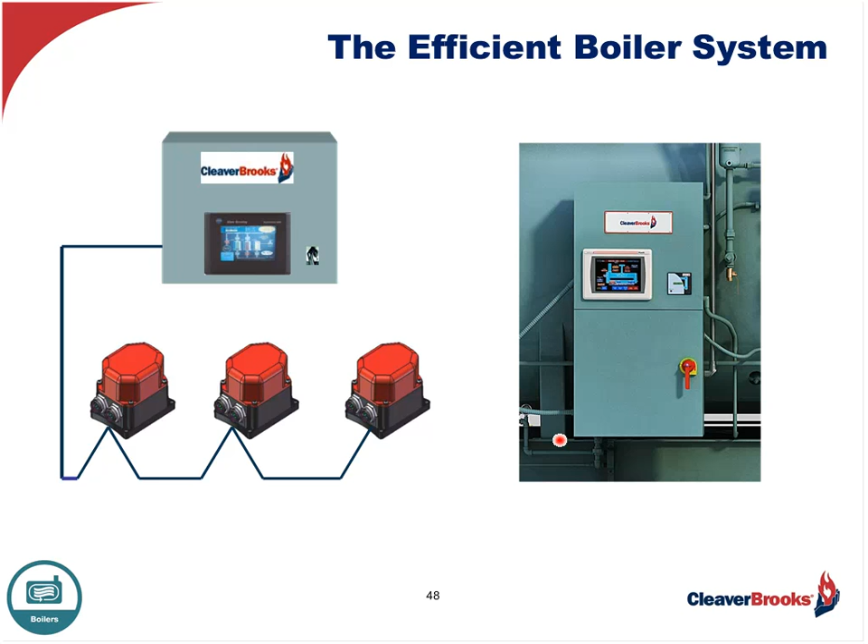And of course, size for the optimum firing rate. We want that boiler to hang at its optimum. Some boilers might be 60% firing rate, some might be 80, 90% firing rate. Your sales engineer, the boiler manufacturer, should know what that is. And of course, combine that with turndown so that when we begin to slip off load, we can still keep that boiler on and firing.

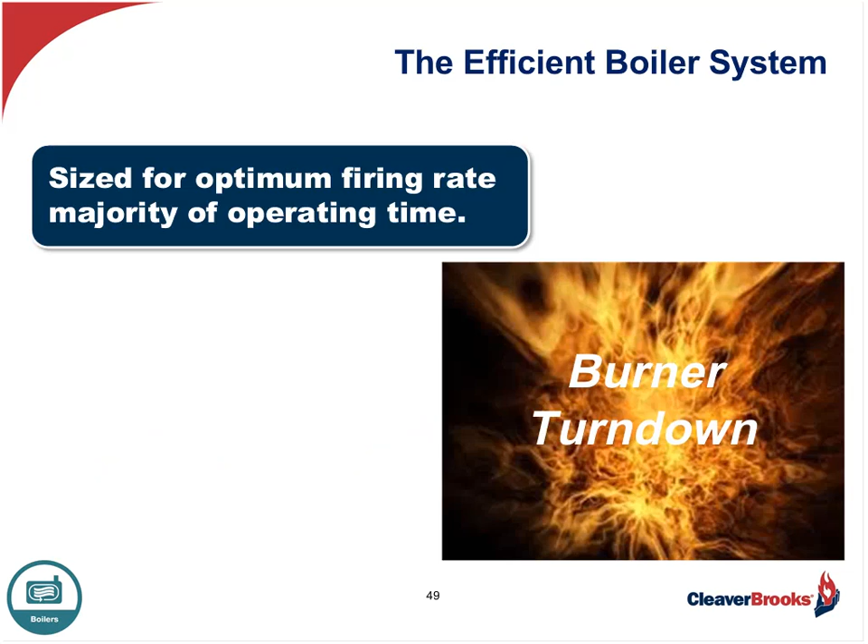Also, take a look at ways that we can improve the overall efficiency of that boiler. Remember, a boiler can only do so much. You get 84, 85% fuel to steam efficiency out of a boiler, it's done about all it can do. So if I want to get that up above 85%, I've got to think about external things that I can employ.

Blowdown heat recovery I mentioned. What about an economizer on the stack? It could be a condensing economizer, or it could be a standard economizer. If I've got a lot of hot water need, where I can take 55-degree water and take it through the secondary exchanger and an economizer and bring that water to a tank for whatever potable use might be considered, I can save boatloads of bucks here. I can take that fuel to steam efficiency up to the 90% mark.

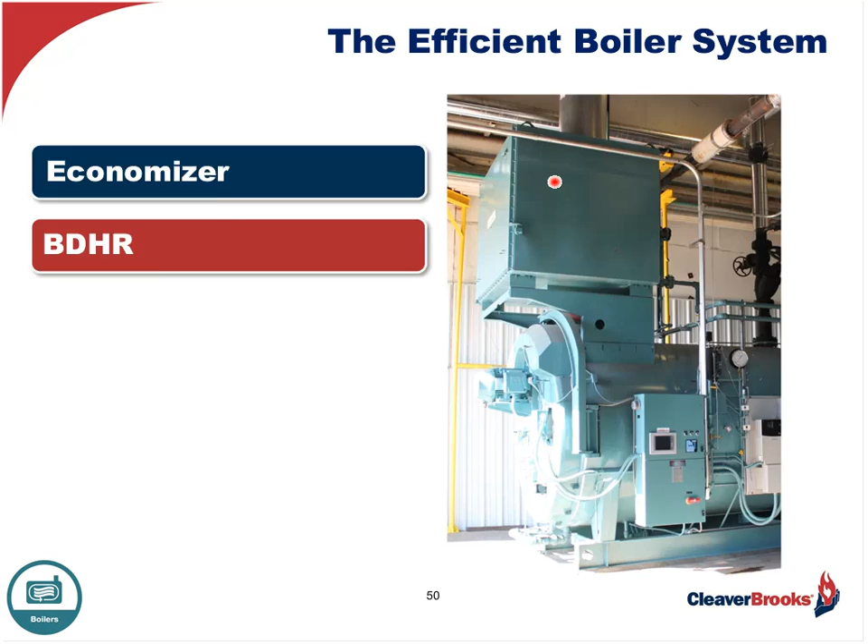So that's what I'm looking at, conserving that valuable resource of oil and gas, the finite resources that come back to us not just as far as the environment is concerned, but come back to us in terms of dollars in the pocket, dollars for the business. We've covered a lot today, understanding about efficiency and about saving fuel dollars. Good for the bottom line, good for the environment too, as we deplete less of our finite resources of oil and gas and contribute to a positive when it comes to the air that we breathe.

So when we look at efficiency, there's a number of terms out there. There's certainly a lot of confusion. And I hope today gave you some insight on what we talk about, at least, when we talk about efficiency.